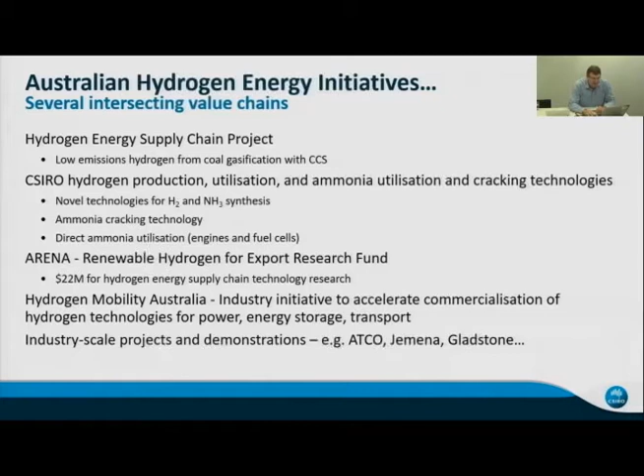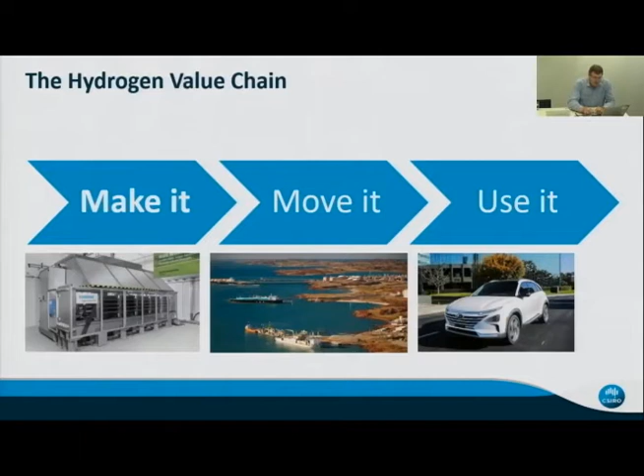But really, the work we're doing is broken into 3 main areas. Patrick and Daniel have alluded to this chain. How do we improve the technologies and the commercial viability of producing hydrogen, of storing and moving hydrogen around, and of using it in end-use applications, certainly with zero emissions at point of use? So very simply, how do we make it, move it and use it around the world? Now, this value chain shown here shows it is a complex system, but it is open to many opportunities to bring in alternative sources of energy to produce hydrogen. Important to remember, hydrogen itself is not a fuel. It's not a resource which we can access. It has to be made.

It's an energy carrier, and there's great prospects for using it as a carrier of renewable energy such as wind and solar, and electrolysis technologies are immediately available technology to do that. Likewise, existing technologies such as gasification of coal and biomass and other hydrocarbons is a viable existing pathway that can provide hydrogen for energy purposes on top of what it's been traditionally used for, mostly in chemical processing and manufacturing. So we have an entry here for a range of resources to feed into hydrogen production.

Now, transport of hydrogen is difficult due to the relatively low energy density of the gas, and that's why we started looking at carriers such as ammonia. Now, Daniel mentioned there are many alternative hydrogen carriers, and we're certainly not ignoring any of those, but if we look at the use of ammonia, there's a significant advantage in getting these value chains activated, in that the ammonia industry is established. Internationally now, ammonia is a heavily traded commodity, the infrastructure is in place, the shipping and transport is established, and so are the regulatory frameworks around which ammonia is traded and used.

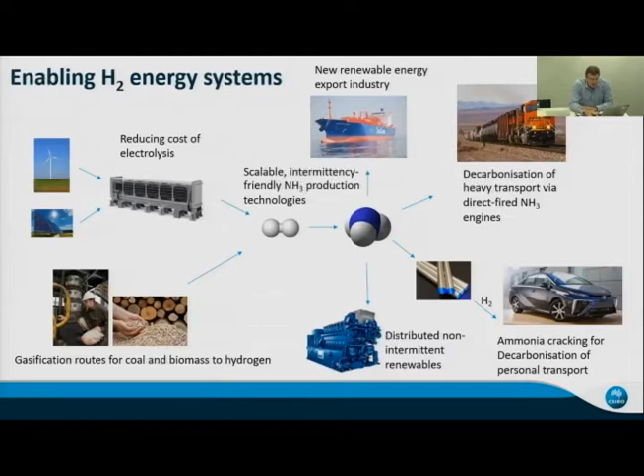And that's where that small membrane shown on the diagram there comes into it. CSIRO has been working for some time to develop a membrane technology that enables us to split ammonia back to hydrogen in a pure form, which is suitable for use in vehicles. Now, that's one scenario. There are other sources, as I mentioned, and I want to touch on those, of getting our renewable resources into hydrogen production opportunities.

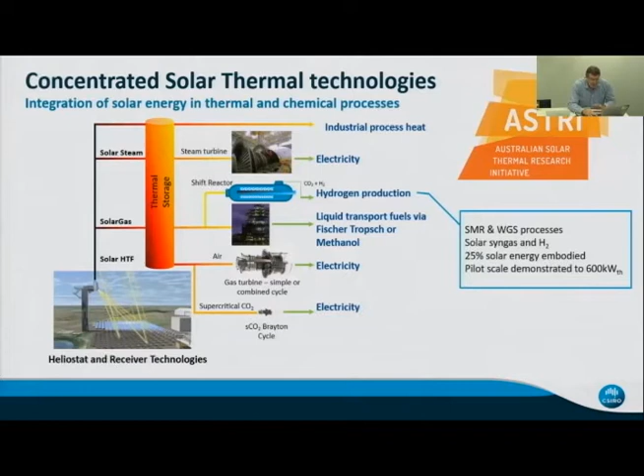Solar thermal technologies are a really good way to do that, where we have existing processes which require heat, and the solar energy can be integrated into that through solar thermal inputs to things such as steam methane reforming, gasification processes, etc. And we do have projects on that now where we are integrating solar thermal into gas reforming reactor situations, so that we can in fact embody up to 25 to 30% of solar energy in those which were originally fossil fuel derived hydrogen products. So there's room for many of these technologies to come into that value chain that I pointed out earlier.

Likewise, fairly established, any hydrocarbon feedstock in principle can be converted to hydrogen. These are established technologies through gasification, syngas systems, and have been widely used for production of ammonia and liquid fuels, electricity, and of course hydrogen. But what we're able to do through the bringing together of these value chains is connect that chemical industry and its transport systems directly to vehicles, as I pointed out in the earlier slide. And that's a breakthrough that will enable rapid uptake of the technology and efficiencies of scale.

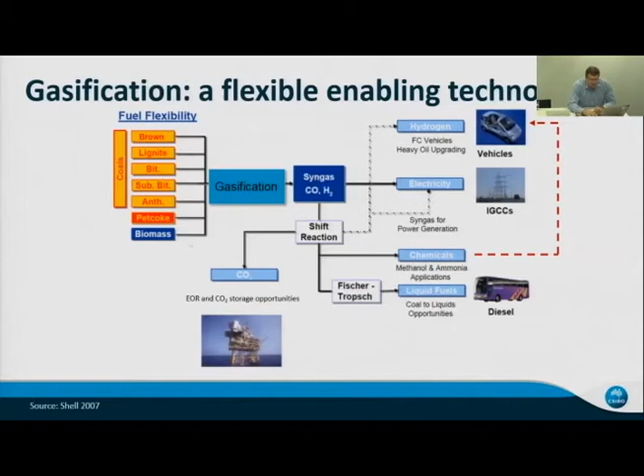CSIRO is involved in all parts of that. As I mentioned, this is just an example of some of the facilities that we have in our laboratories here in Brisbane, where we are looking at, as Daniel mentioned, electrolysis and advanced production methods for hydrogen using novel approaches,

but we also have equipment and facilities relevant to existing industries, large-scale coal gasification, biomass conversion, waste conversion, etc. These sort of facilities fit very well into the development of these value chains.

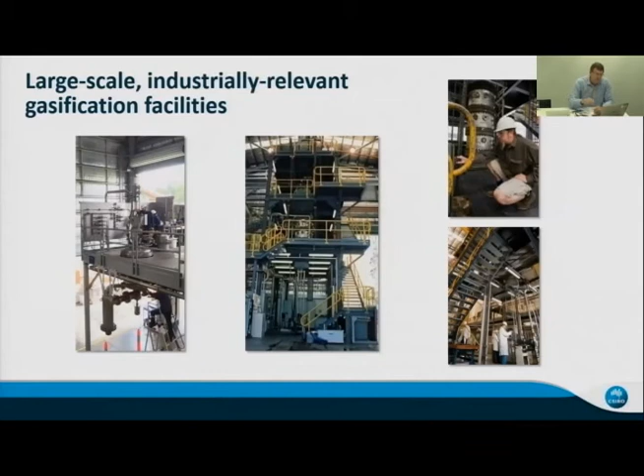So an example of where those, if you like, more traditional technologies fit into the creation of this new industry, as I mentioned earlier, is the Japanese initiative in Australia, where they're looking at large-scale conversion of coal in Victoria, and ultimately looking at around 770 tonnes per day of hydrogen production. That's a major undertaking, and is a large-scale gasification project requiring integration with an extensive carbon capture and storage project.

Now, that's integrated with another national activity called the CarbonNet project, where a CCS hub is being considered to bring CO2 from a range of industries for large-scale storage. So that project is an important part of both developing a hydrogen industry and also improving the economics of carbon capture and storage.

In this scenario, KHI are looking to liquefy the produced hydrogen and carry that to Japan in liquid hydrogen tankers, not unlike in concept commercial LNG carriers. As you'll see on the right-hand side, the liquefaction of the hydrogen is a major, in fact the major contributor to the cost of the hydrogen, about a third of the total costs attributable to the liquefaction step itself.

So there are opportunities for us to look at reducing the costs on that value chain along the way towards the targets that Patrick pointed out in the earlier presentation. An interesting point to note is that the cost of CO2 capture and storage in this application is relatively small and therefore relatively achievable. Whereas in many previous CCS applications where power has been the primary product, the economics are certainly not as favourable.

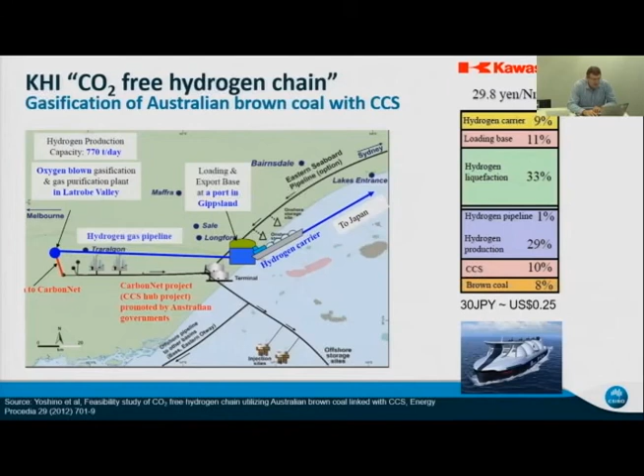So a really important enabling project in many ways, and a real opportunity to look at hydrogen markets and export at scale. And that's where we come to some options with respect to moving renewable energy around in the form of hydrogen. Daniel mentioned some work on novel carriers.

And as I mentioned earlier, that's an established industry, so we don't need to develop the new facilities, the new liquefaction, the new transport of liquid hydrogen to get started in hydrogen transport if we go with that route. A very attractive carrier. Some of the other carriers are also attractive with respect to the volumetric density of hydrogen, but many of those also have carbon associated with them, and while it's doable, it requires some additional work at the destination end to manage the net carbon emissions across the chain.

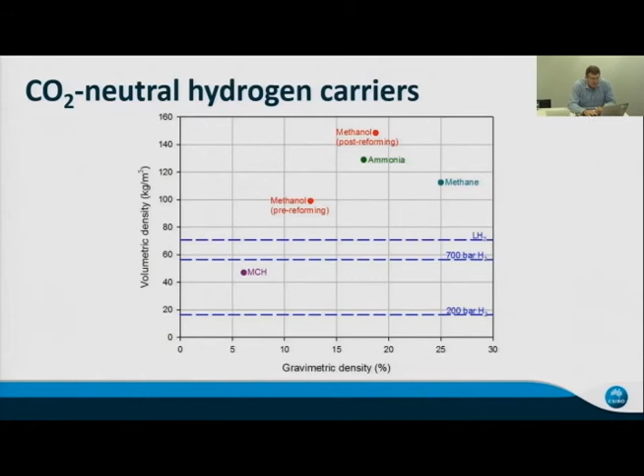So considering ammonia, the established industries based on Haber-Bosch technologies, large scale, they are high temperature, high pressure, carbon intensive processes, and that's a place for us to begin. And as I showed earlier, it's possible to inject increasing amounts of renewable hydrogen into those systems.

Ultimately, we'd like to directly produce renewable ammonia and potentially do it in scattered locations at sensible but relatively small modular scales. And that's why we are looking at technologies such as the example shown here of renewable-based direct ammonia production using, could be electrolysis and using various membrane technologies to allow us to do that at lower pressures and temperatures with lower energy inputs. And I would expect a more distributed approach to ammonia production and distribution.

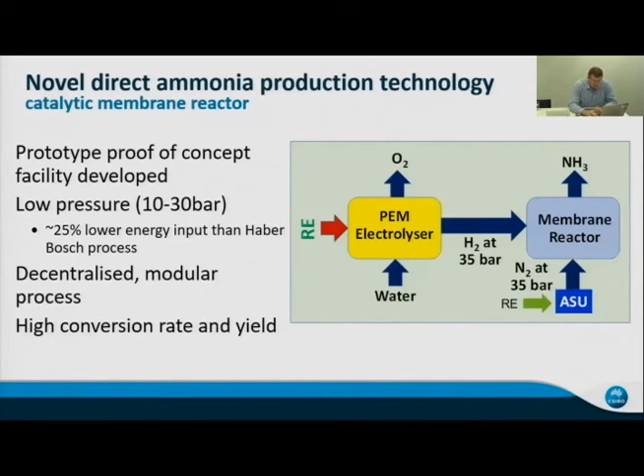And now, how do we use it? As I said, it's important that we can get back to high purity hydrogen at the other end, and that's the nub of the CSIRO membrane reactor technology, where we've, as shown in this slide, developed a membrane that's capable of separating hydrogen from a wide range of mixed gases, if you like. In this case, we're looking at splitting ammonia to hydrogen and nitrogen and continuously removing that hydrogen through the membrane, which is 100% selective to hydrogen.

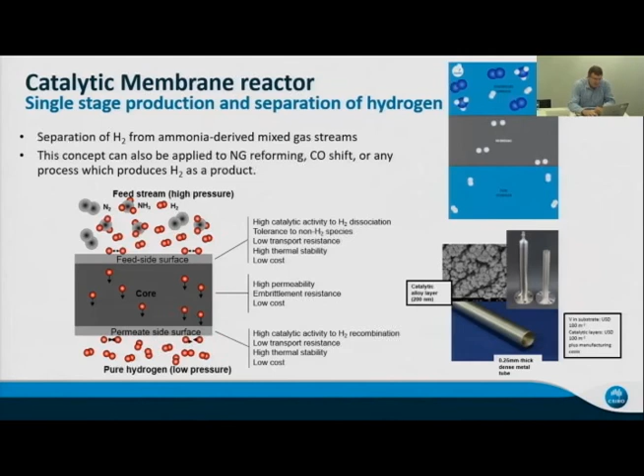And we can produce high purity hydrogen in a modular technology, which does lend itself to applications such as fuel cell electric vehicles, and opens the doorway, as I showed in the earlier slide, to using ammonia as a feedstock for vehicles in cities around the world. We have done a bit of a demonstration of this, and we've developed this technology to the scale of approximately 15 kilograms a day, which is enough to refuel 3 vehicles.

And we've certainly had a successful proof of concept demonstration of that, and we're now in the process of looking for larger scale applications of that technology so that we can develop the appropriate scalability, the appropriate commercial development pathways, and also define appropriate operating conditions.

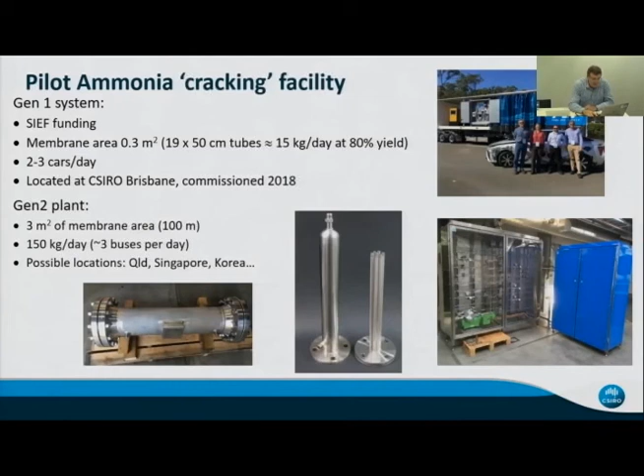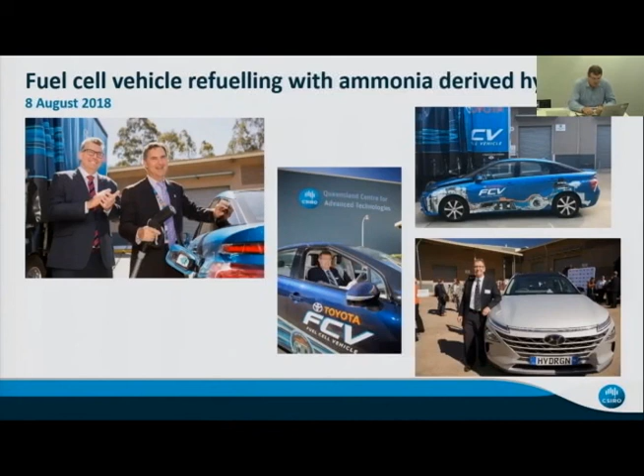You'll see, and this is a bit of an example, we did a demonstration recently where we worked with Toyota and with Hyundai, and were able to demonstrate for the first time refueling of vehicles with hydrogen derived from ammonia directly using this technology. That was a very successful demonstration and has now laid the platform for next steps, where we're looking to take that to a larger scale demonstration and integrate it with a range of hydrogen sources so that we can start to develop these technologies to the point where they will facilitate the creation of, in this case, an ammonia-based hydrogen distribution industry.

So the next steps we're looking at here are to produce a larger scale facility which would support something like, conceptually, refueling of commercial buses and cars, around about 150 kilograms a day of hydrogen, and also demonstrate that other part of the value chain I pointed out of power generation directly from ammonia. So you could imagine refueling fuel cell electric vehicles and battery electric vehicles from ammonia, which could have been distributed or transported from remote areas of Australia with high solar flux to an industrial port, for example.

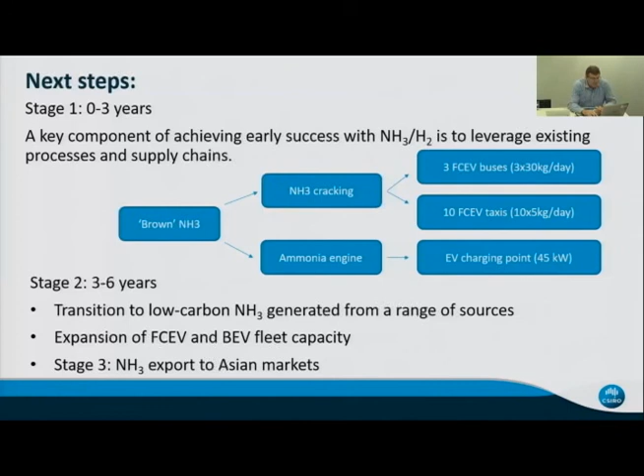And that's the purpose of the studies we're doing now, to bring industries together to be able to demonstrate those as we transition ultimately to higher and higher inputs of renewably sourced hydrogen, and perhaps directly renewably produced ammonia for these sort of value chains. And that's the sort of industry network that's driving a lot of this work, bringing together a range of energy sources, more and more renewable inputs to hydrogen production, using and working with existing industries to leverage the infrastructure that we have.

As Patrick pointed out in the first of these talks, the infrastructure is one of the major barriers to market activation, and the work that we're doing here is a means of leveraging existing infrastructure to get these markets started, be it for power generation, be it for hydrogen fuel cell vehicles and hybrid systems where we're bringing together power, hydrogen, renewables and clean paths to fossil fuel utilisation.

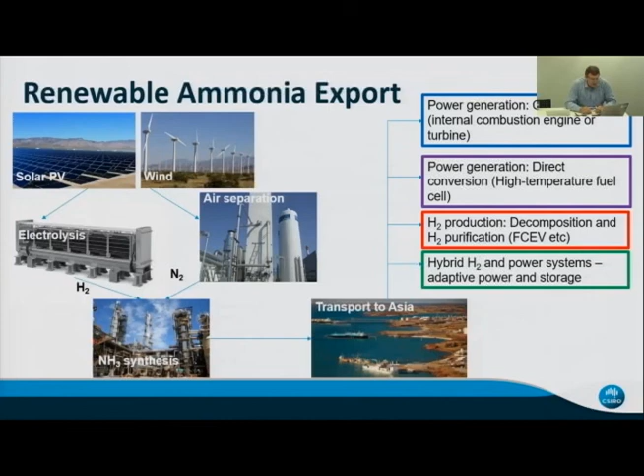So I hope that paints a bit of a picture of how the science, the technology, the markets and the industry can all come together, and how important it is to work with the industries that we have to accelerate the development of appropriate infrastructure to support many of the breakthroughs that the science and technology will make possible.